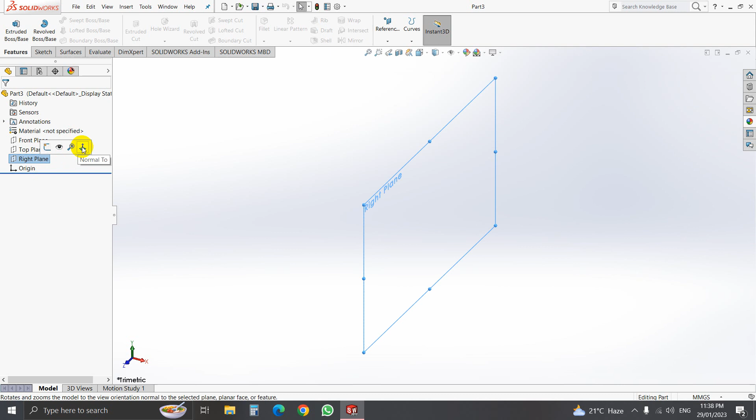Now select right plane, click normal to. Now go to sketch, select center rectangle, click on the midpoint, then set height

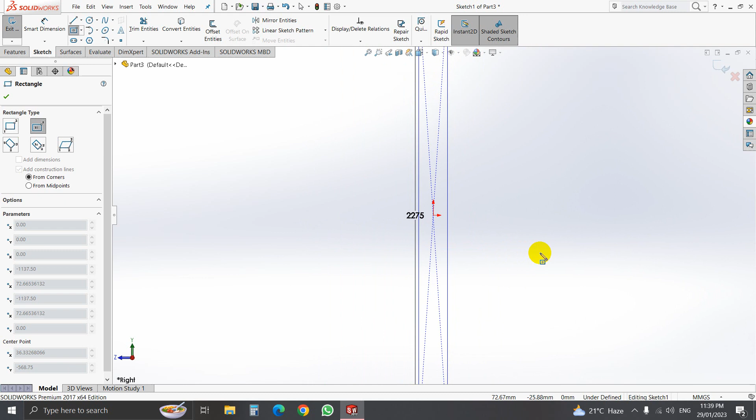2275. And the length... no, we have just made a mistake. Length will be 2275.

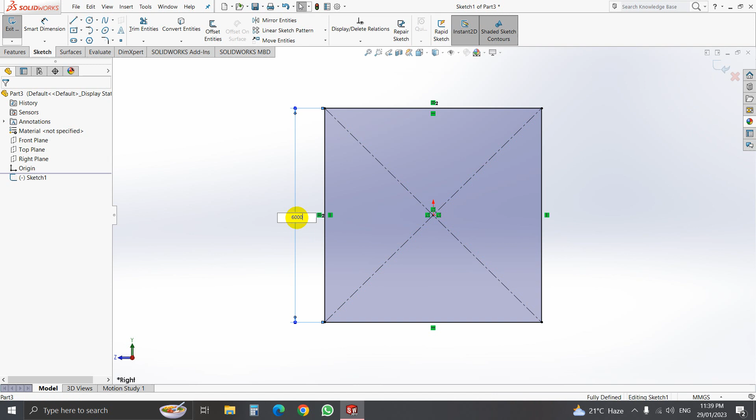Okay, tick here, and then change height to 6000 millimeter, and our length will be

There is a mistake, we have done a mistake, so back.

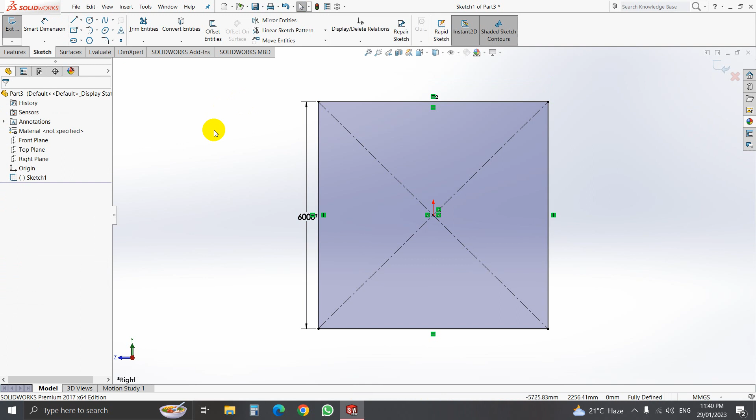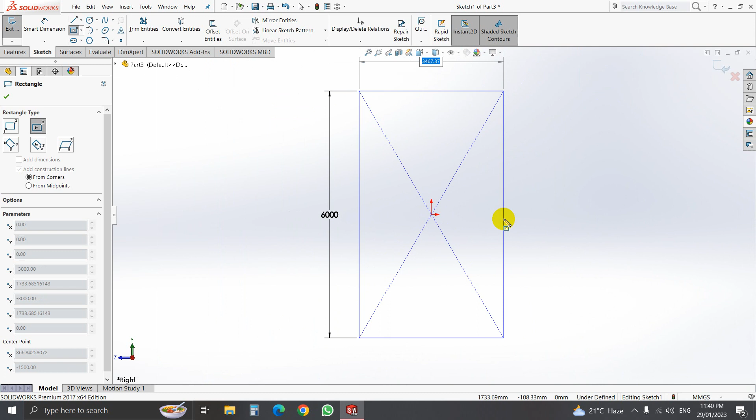Okay, this is our plane, right plane. Select a center rectangle, then put height 6000 and length is 2275 millimeter.

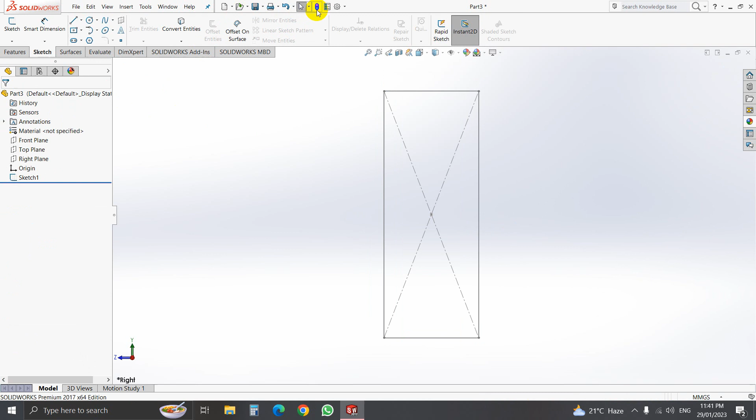That is our glass cover side part. Okay, now rebuild, select sketch, and we'll make it 3D.

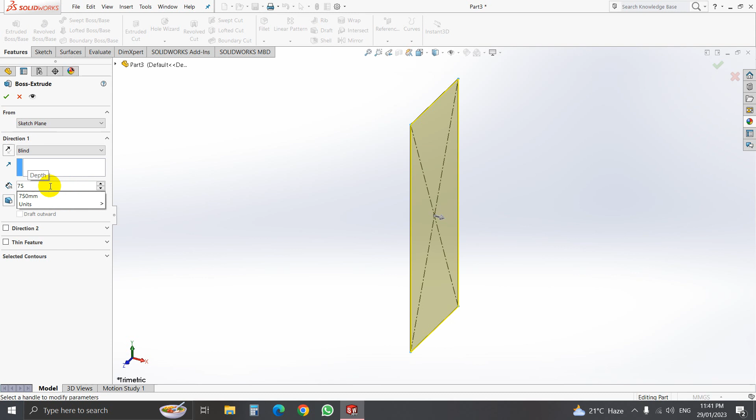Go to feature, select extrude boss, and thickness here we should put 75 millimeter thickness. Okay, that will be our glass material.

So change the material, go to glass section, gloss, and we will select reflective clear glass. Okay, that is our glass. So this is our glass cover.

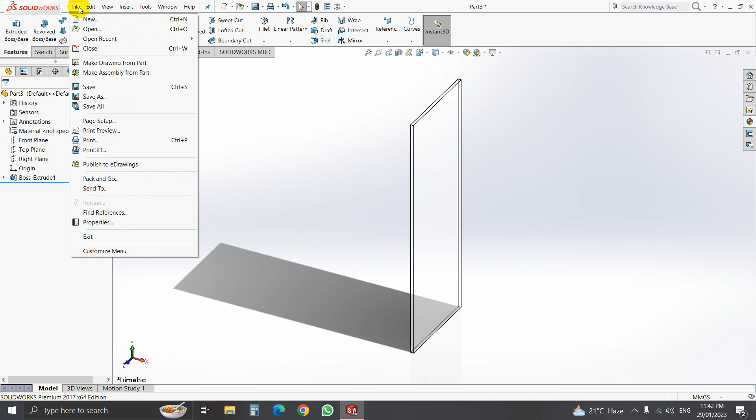Now we will save it in the same way that we have discussed in our many previous videos. Go to file, save, name it as okay, properly select your destination file.

Okay, name it as glass cover side. Glass cover side.

Remember this, you should put all the parts in the same folder. That will be helpful when we do assembly. Okay, save.

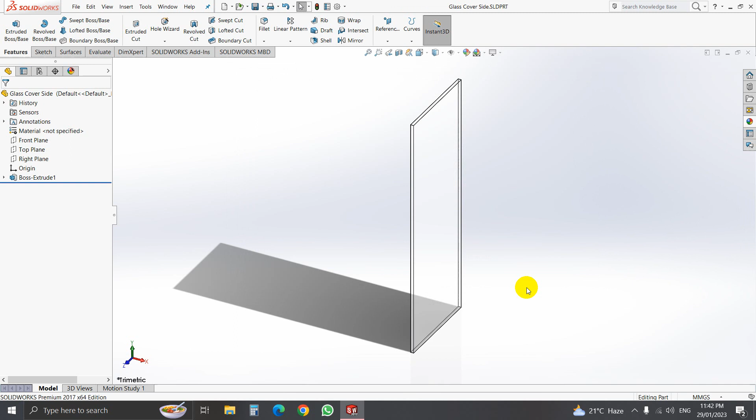Okay, our glass cover side is done. We will do another part in the next video. Thank you.